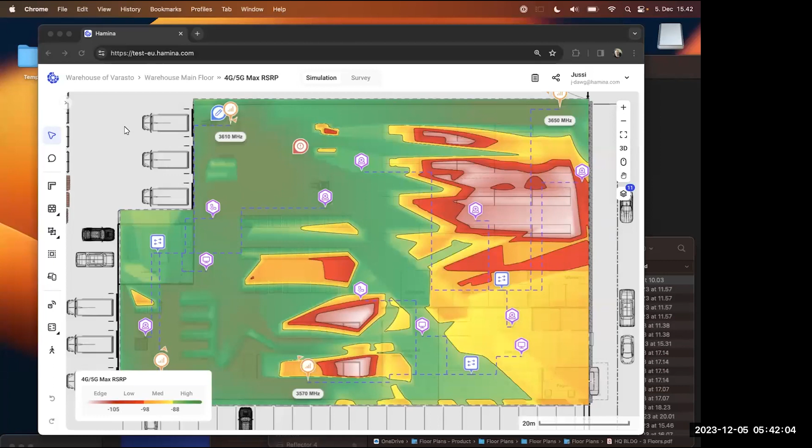Yeah, I mean, since you mentioned - and it's funny, totally unscripted - but you mentioned the warehouse and the racks and shelves and picking, robots picking pieces from whichever rack. So let's take a look at that first. Can you see my screen? I wonder... Yep, I can see your screen. Perfect.

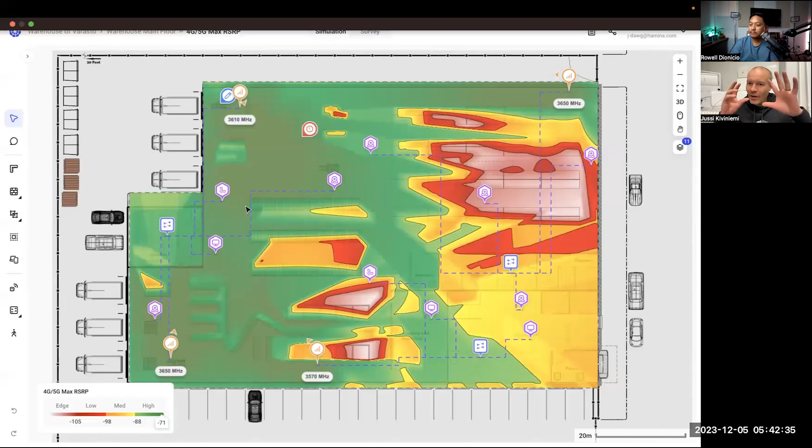So here's our tool. What I did is literally just dumped in a JPEG and then built the racks - took me like 4 minutes or something. Kind of a few main walls and the racks for this smallish warehouse. And it seems like I put in some private cellular access points, and it automatically optimizes them on different channels. But Wi-Fi is similar, and we can take a dive into Wi-Fi later on as well. This guy has a couple of switches, some security cameras connecting to the switches, and some displays, and then these private cellular Node Bs as well.

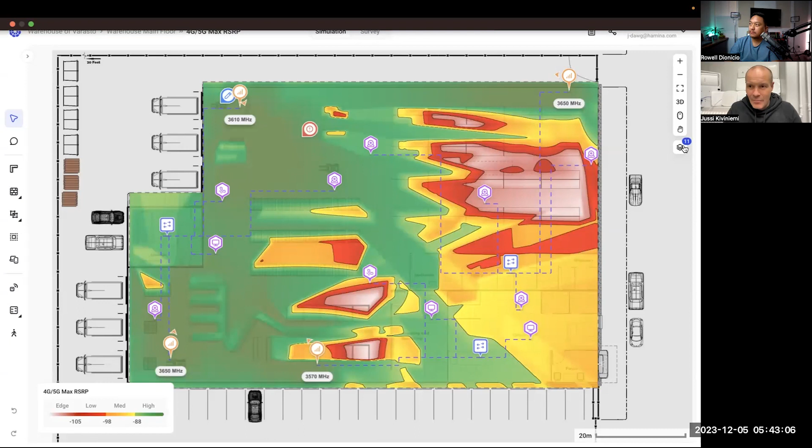But if we look at the 2D, it's quite amazing already that we can actually predict in 2D and see the signals flying through the shelves, and seeing at the bottom you can see because this AP isn't very high, there's shadows behind the shelf, stuff like that. But how do we know, first of all, that we constructed the model properly, constructed the building properly, and then how can we see better how the signals behave?

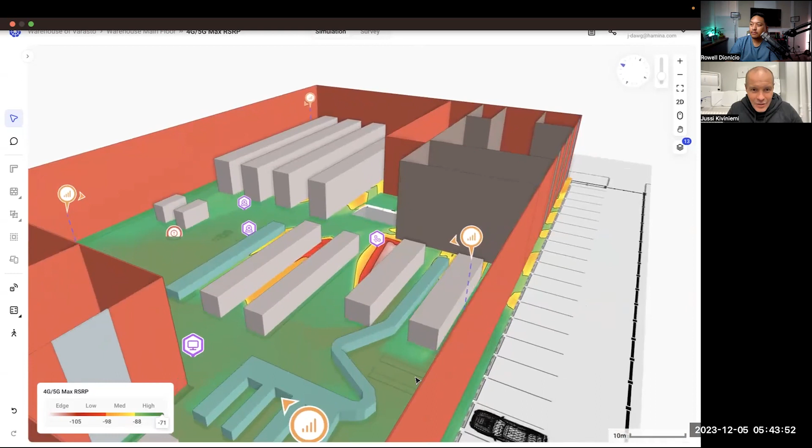That's why we built the three dimensionality, and I think this is pretty exclusive stuff you're seeing, in a sense that this doesn't even ship yet. We've added a lot of look and feel improvements to the three dimensionality. So if this looks a little different and a little better than your production Hamina product for our customers, that's because we will be adding a couple of three dimensionality look and feel additions to this soon as well.

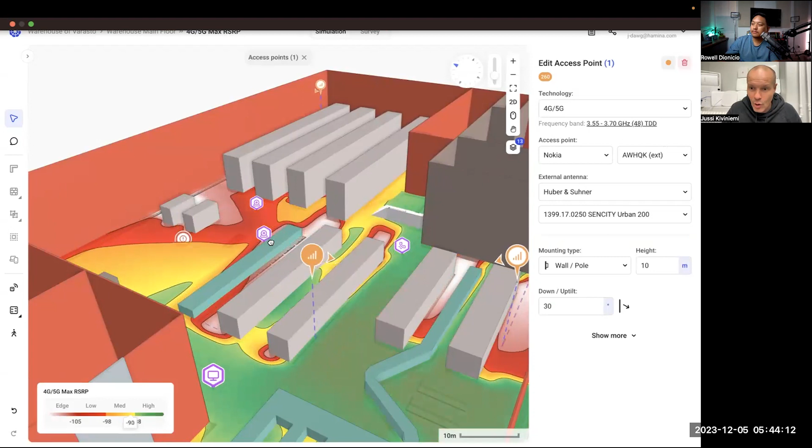But if we look at it in 3D, it starts to make a lot more sense how the signals behave and go over the shelves and stuff like that. It just looks a little bit different that way. And then when you mentioned the floor level versus ceiling level, let's take a look at that. So right now we're looking at 0.6 meters, so 2 feet high from the ground.

That's fairly typical height for a client, and that's where the heat map sits—so that's where we assume the client device to be at. Right now it's at 0 meters, so it's at the very bottom. As we start raising it, it updates almost in real time.

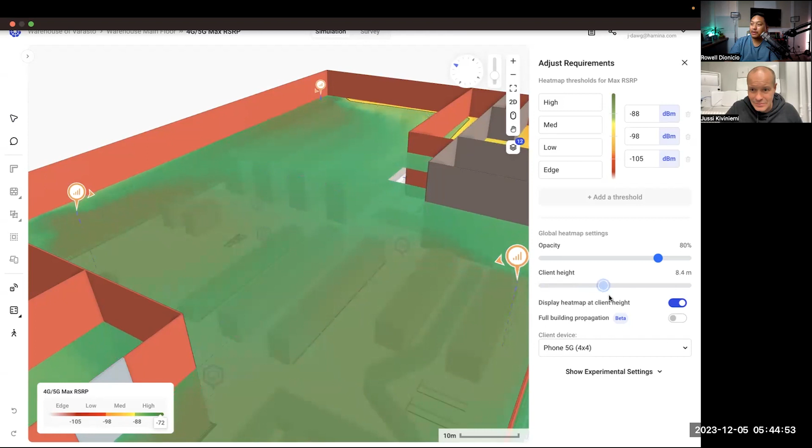Although I mainly operate in feet—I think 8 meters is about 20, yeah, 25, 30 feet for sure. Let's change that for you.

While you change that, I just want to explain for people on the audio: you've got a little knob here that sets at what height a client will be. All you're doing is sliding a slider, and it tells you how high the client will be in meters or feet, whichever your preference is. That way you can verify you've got Wi-Fi signal at the height you need, where the clients will actually be.

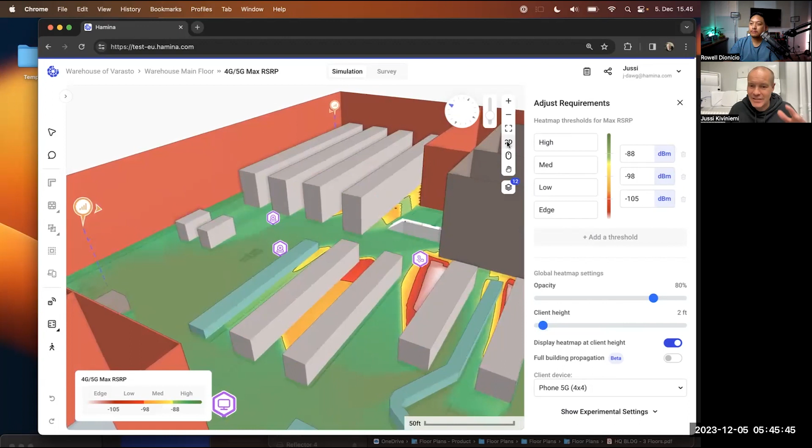Exactly right—this gives a whole different kind of perspective. A few things like validating the project, such as shelf height. For example, here we have shelves and boxes of different heights, and validating that all of that got done.

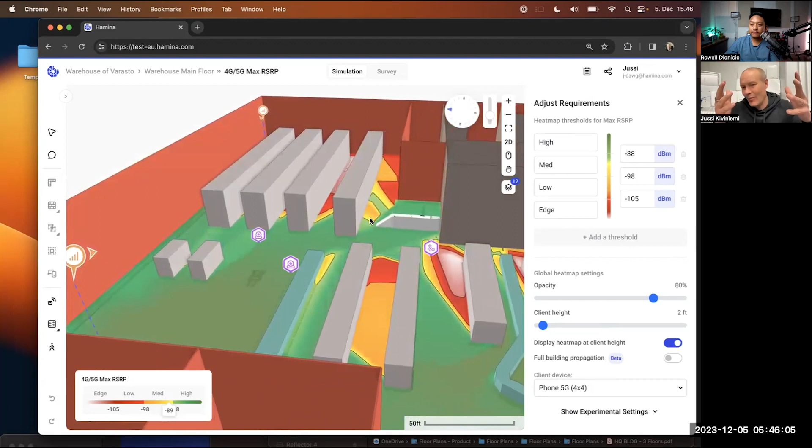The walls are of certain height and appropriate height—maybe you have some walls hanging from the ceiling, stuff like that. But also, when showing this to the customer in the pre-sales phase, or when constructing a report for the customer, it's a different animal.

Actually, if you look closely, there's even a ramp there and a raised floor. That leads us to a whole different dimension of three-dimensionality where you can raise floors, do ramps, things like that.

I'm curious, could you create a mezzanine then? Because I know mezzanines are somewhat popular with a few warehouses. Yeah, you could raise the floor up, or you could create just a slab, things like that.

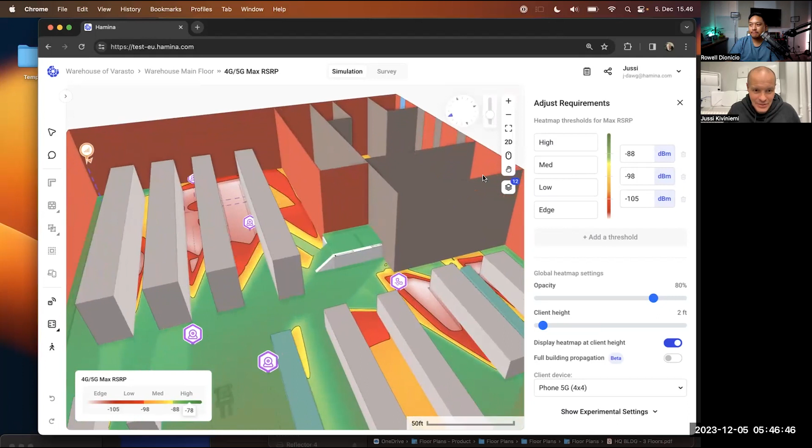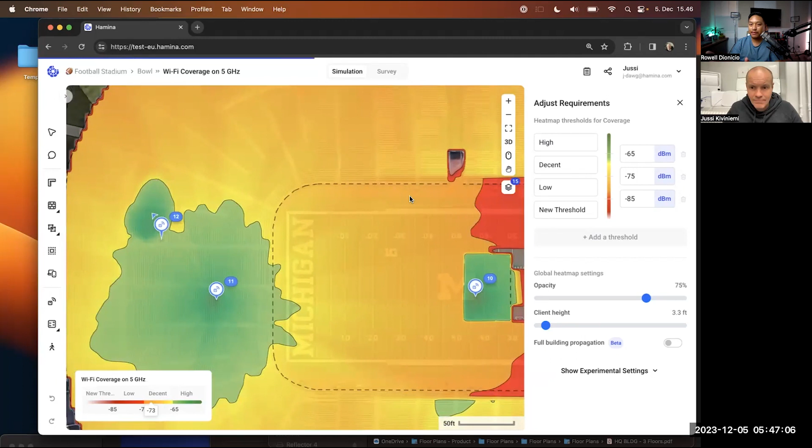Absolutely. And I like how you're explaining how you can show this to people, because I think this is where it really starts to click with project managers and cable installers. Sometimes you don't want those APs installed right over the rack, so it's really easy for them to see, all right, I've got my product there—what does Wi-Fi look like in the aisle? That's a great way to collaborate with others who aren't Wi-Fi professionals.

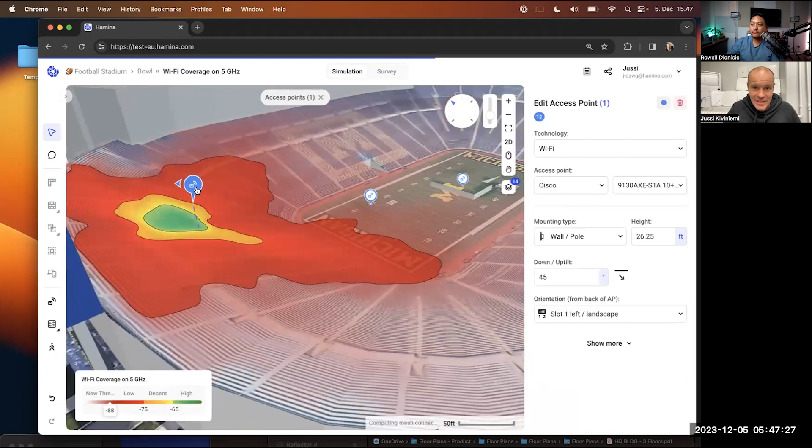And if you use the slopes a bit more extensively, you can actually work your way through stadium design as well. For example, this stadium consists of I don't know, 25, 30 slopes that curve around the stadium, and you can even do quirks like the entrance to the tunnel where people come into the stadium from.

Yeah, actually, some guys when I was showing the product when the 3D feature had just come out were like, 'But you didn't model the place, the entrance where people are coming from,' and live I kind of modified the slopes and put that there.

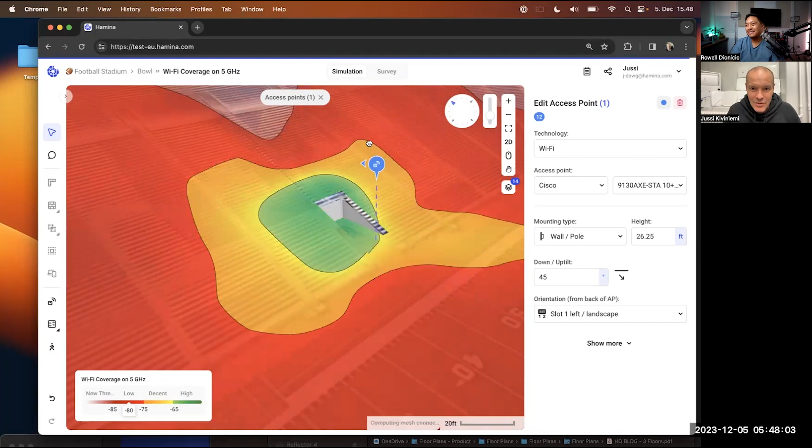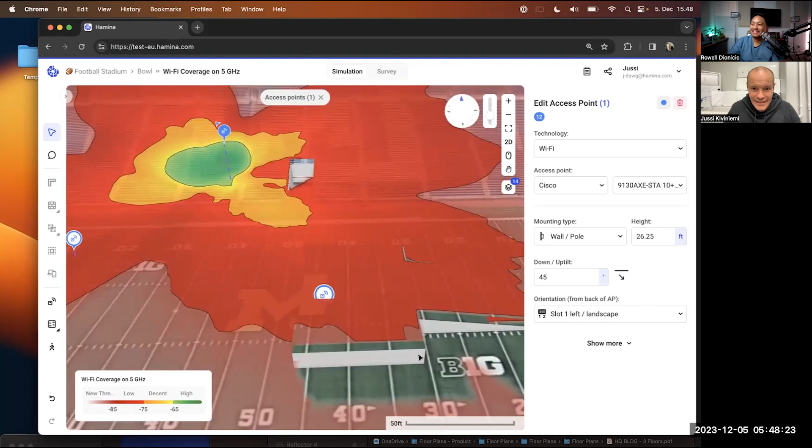So essentially I think the beauty is keeping things simple, but still allowing people to do super complex designs if necessary. For example, see here—we have just a raised floor and then a slope to the raised floor. That's an oversimplified example of how to construct these things.

You can see this ramp leading right onto the raised floor—football field, exactly, Beyoncé is about to perform or something like that. So we actually do the work in 2 dimensions, and then we just flip it to 3D for analysis and validation, stuff like that.

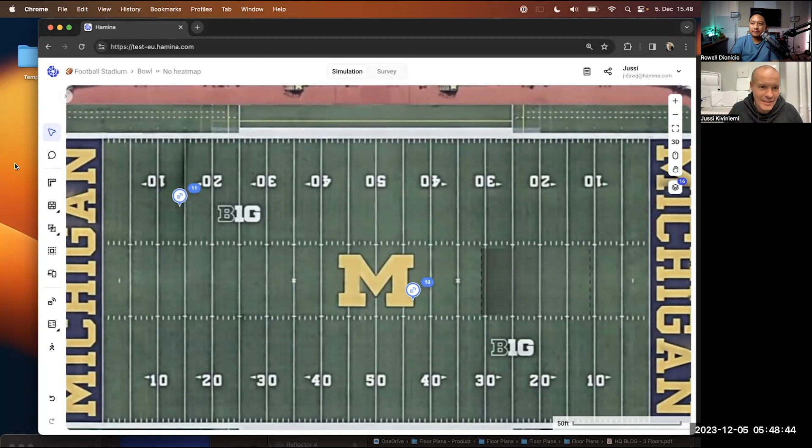Let's create another one of those. We all probably know how to do walls and attenuating objects, but what if we want to do those raised floors and slopes and stuff like that? We just put in the height—let's say for a raised floor, the height of it—and also, of course, what's important is the material of the raised floor, since the signal will also go through that.

So let's put in, I don't know, a 5 feet thing there, and we could modify it after the fact. We'll just enable the raised floors here. Let's say it's exactly 5 feet, and there we go—so we can see, yeah, that's the switch. So you're building the raised floor slopes in the 2D model, then flipping it over to 3D to view it.

Exactly, so you get the ease of use and quickness of deploying these things, but you combine that with true three-dimensionality. At least that was the founding idea here.

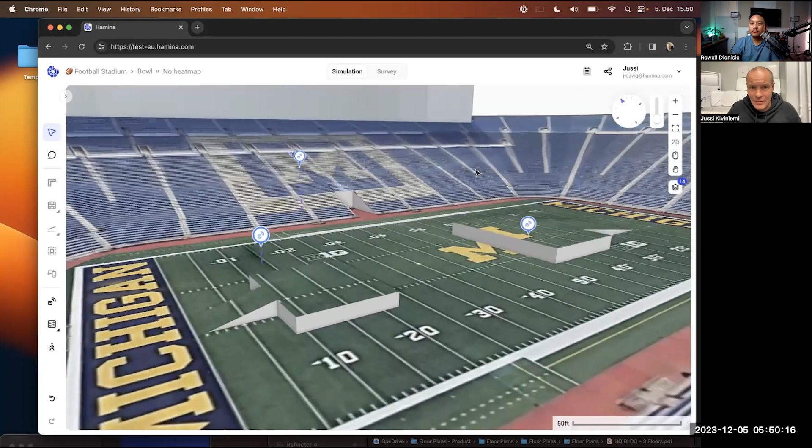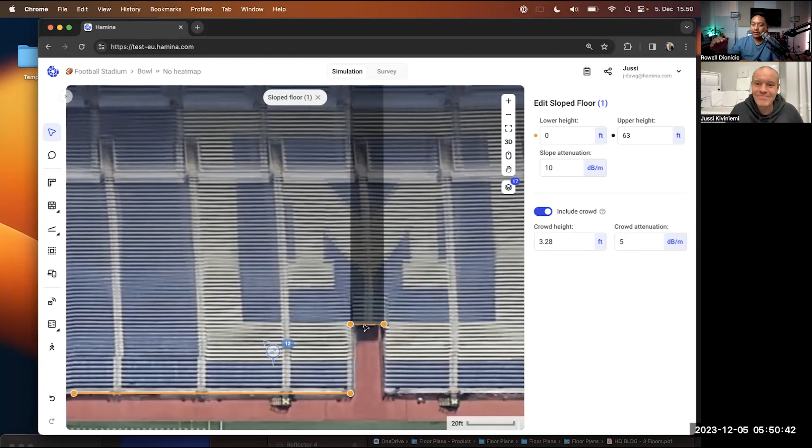The stadium is made out of similar slopes. So here's a slope, you can see the black dots form a line, orange dots form a line, and the next slope would be here, for example, this would be one more slope, stuff like that. So the stadium just consists of slopes, and then we cut the slope so that it starts at the tunnel right there, it doesn't go all the way down like the other slope. It's pretty easy to map it closely to how the stadium looks like, and you can get a pretty good overview of it.

And what you can do with the slopes, because often slopes are used for stadiums and arenas and stuff like that, we actually added a feature where you can directly add crowd on top of the slopes, because often you want to model the audience sitting on the slopes, because that will affect the signal, especially in underseat type of deployment where you actually utilize the crowd to your benefit. You want to see how far that signal can get through the attenuation of the crowd.

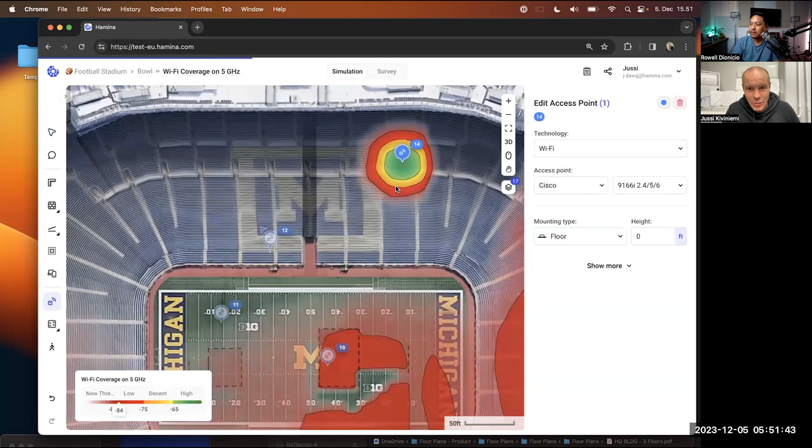And for example, let's put a floor mount Cisco 9166 here, and we look at 5 gigahertz Wi-Fi. There we can see that it's actually quite nicely contained, until, because it flies over the crowd, it actually does hit these opposing stands, because there's not so much crowd in front of the AP there compared to downwards.

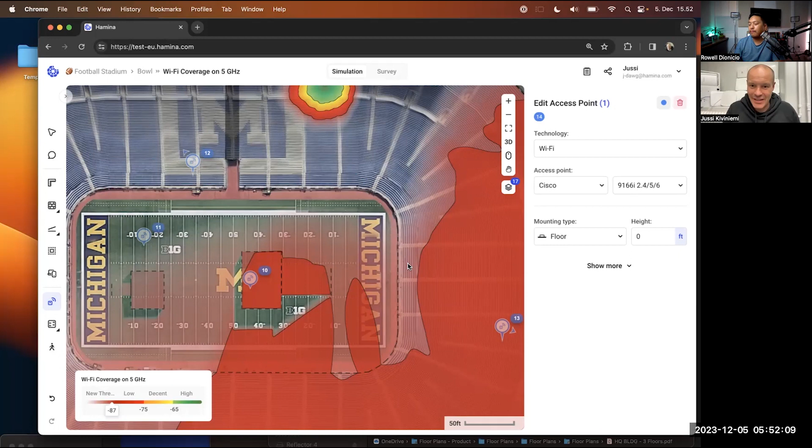So that's also something you can predict, that's predicting the signal of that AP even on the other side of the stadium, like how far that signal would go. There's a lot of stadium deployment persons, like Chuck Lukaszewski, who has spoken about this very thing, where from the very other end of the stadium you can hear an AP and get actually decent throughput on a phone from the other end of the stadium.

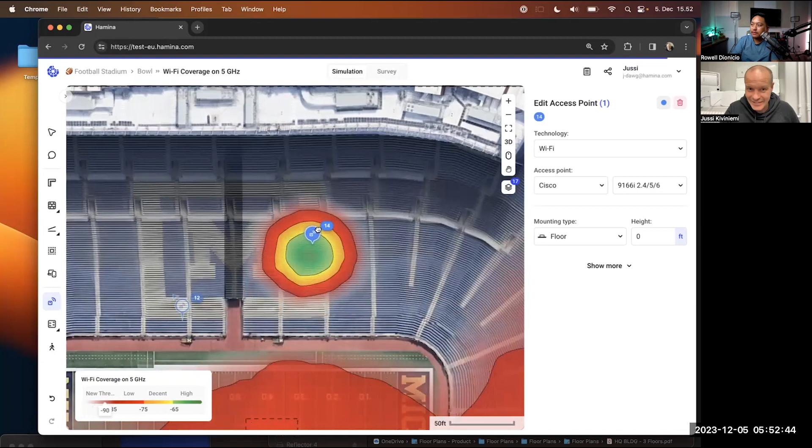It's just the thing that happens even if you do underseat APs. But if you do underseat, it's quite well actually contained, because I have modeled some crowd on top of this. But if we move this guy, you can see the propagation changing, it's very well audible everywhere. So that crowd attenuation is actually working.

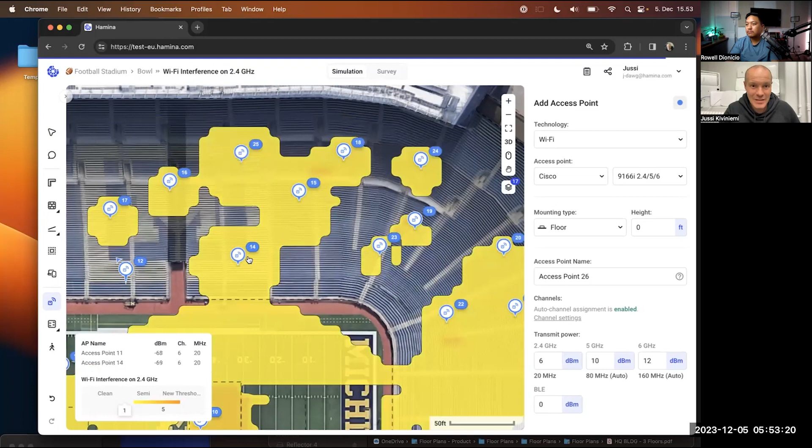And of course, we could also start to see interference problems. Let's make this a chaotic scenario where we're enabling everything on 2.4. So we'll enable auto channeling, but we will enable all the 2.4 radios. And when we start building this out, of course, if we didn't disable any of the 2.4 radios, no matter how badly the software tries to optimize the channels, the 2.4 will pretty quickly turn pretty chaotic. That's just the nature of the beast. But it's quick and easy to deploy and easy to design and easy to see.

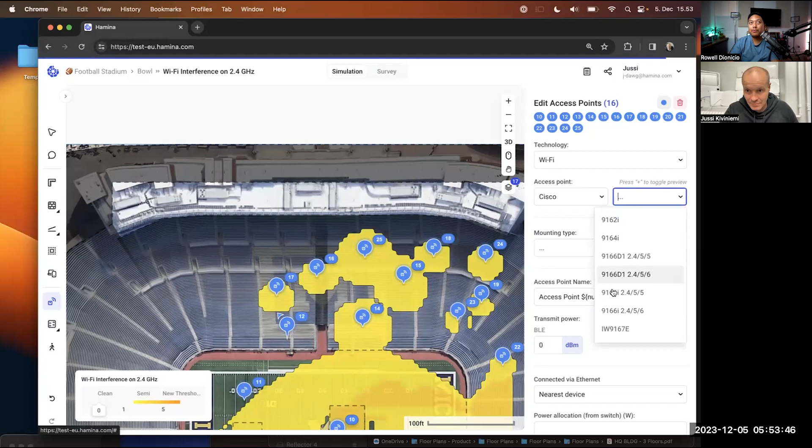All right, I have an issue here, I need to change frequencies, there's not enough 2.4 available. Even if someone were to say, well, maybe the crowd attenuation might help, it's not helping it very much.

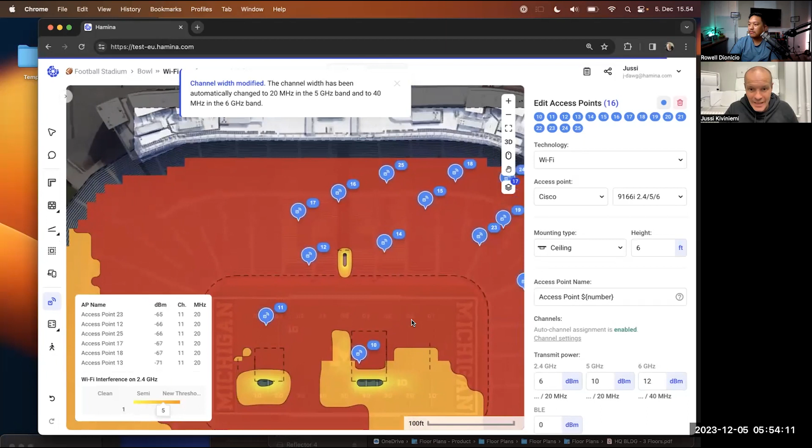Crowd attenuation does help, though it's not the ultimate solution. If we have everything at 0 feet, it helps dramatically. But if we raise these to 6 feet on poles, let's see what happens with the interference—there's a dramatic difference in crowd attenuation, just absolutely massive.

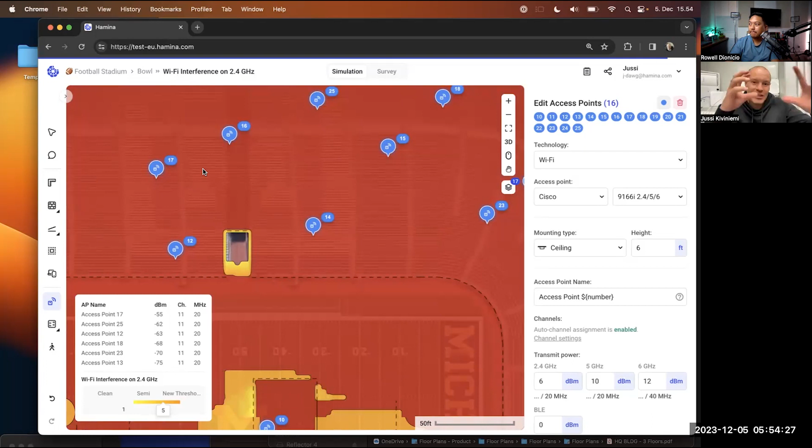We can see on the bottom left how many APs are interfering—quite a lot, even though we haven't nearly filled the stadium with APs. It's pretty bad. Coverage is easy in the stadium; the hard part is eliminating the interference.

Of course, if we selectively disable the 2.4s, we'll start to get a better result. But then we'll end up disabling quite a few of those as well.

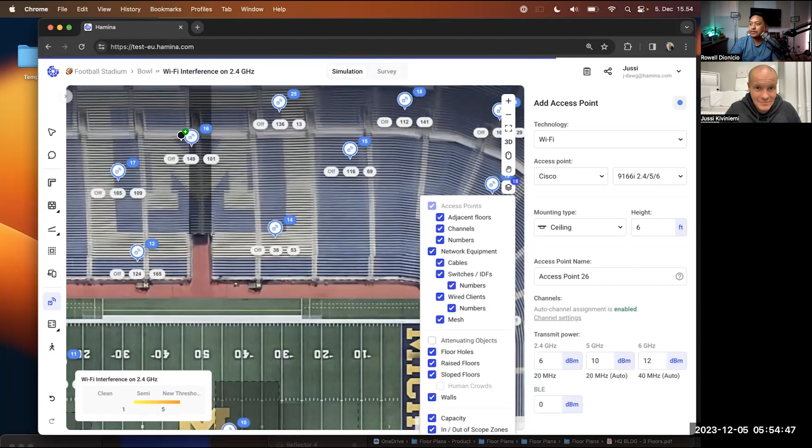That's good—I like the whole crowd attenuation, sloped floors, raised floors concept. Really cool, useful features for designing a complex environment. For me, it's more in higher ed use cases where you've got sloped seating, like in a lecture hall, so I can see this working pretty nicely.

We could look at a quick university design and see if we can get any 3D benefits out of that. So you're fairly familiar with university, aren't you, Rowell? Yeah, you've served your time, one could say. Done some pretty large lecture halls, and usually capacity is an issue with the installation options as well.

When working with installers, they always want it hidden, tucked away in the walls and ceiling. Some don't want underfloor because of construction costs, but this is a great way to show them—design it your way and see what the Wi-Fi looks like. They tend to agree with you afterwards once you create a design, because you get all the stakeholders involved—construction, architects, IT people for that specific school.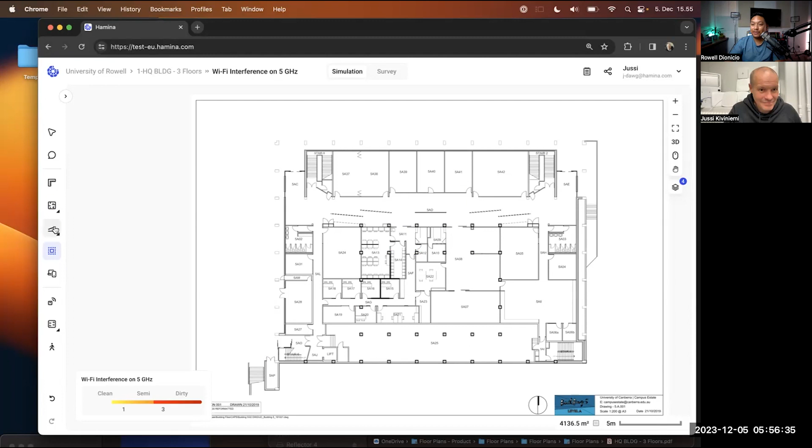When I'm showing them what happens with a bad installation, they tend to listen. I did this with Hamina, where they did a lecture hall and wanted to tuck the APs away in the walls, hidden. I showed them what would happen if somebody walked in—it showed devices only stuck to one AP, even though there were three APs in the room. So we went from mounting them on the wall to mounting them on the ceiling, unhidden. Once I showed them that with Hamina, they agreed—they bought the idea.

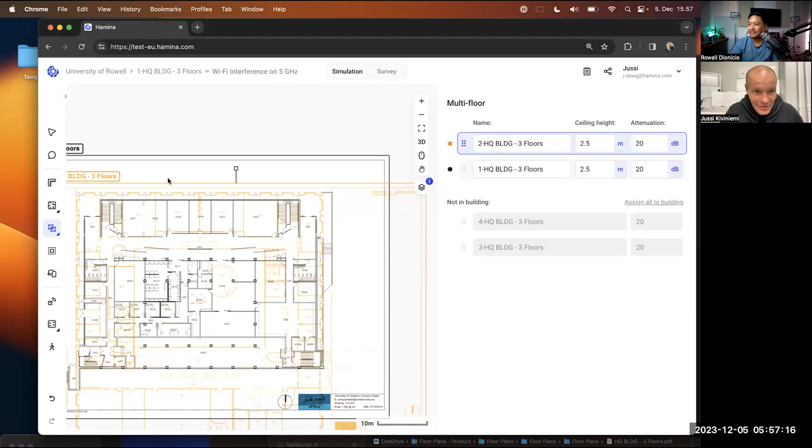What I'm doing here is building maybe an educational space—seeing how the stairs line up. I'm just building something we can test against. I have no idea how these guys line up, so maybe that's a different building. But we'll use two floors, line up the stairs, and for the second floor we'll bring in some walls and stuff.

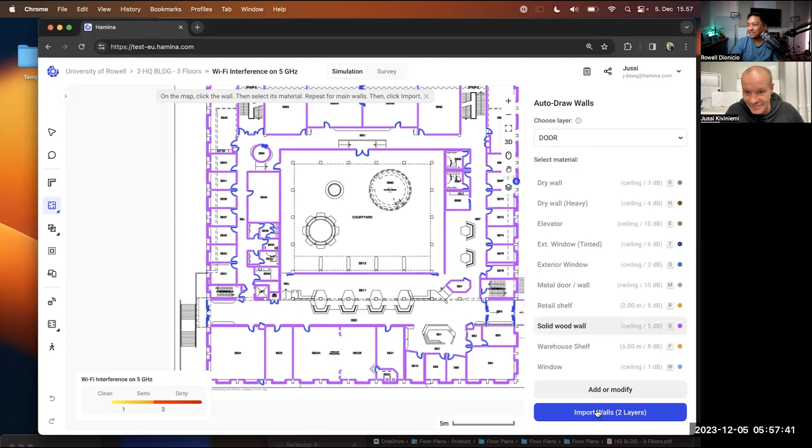That's automatically scaled since we're building this out pretty quickly. Well, yeah, I've used the software once or twice. You could say so—in the matter of a few minutes, you built out two floors with the walls aligned, multi-floor.

Here's a courtyard, so we might want to use a floor hole on the courtyard to freely pass the signals through. There we go—you can see the walls derived from the automatic wall drawing system, same with floor number 1, looking decent. We'll take out the walls and start.

What's your AP of choice these days, Rowell? What do you deploy the most? Using the Mist AP45—that's Juniper AP45, a Wi-Fi 6E, 6 gigahertz capable AP. So let's start deploying.

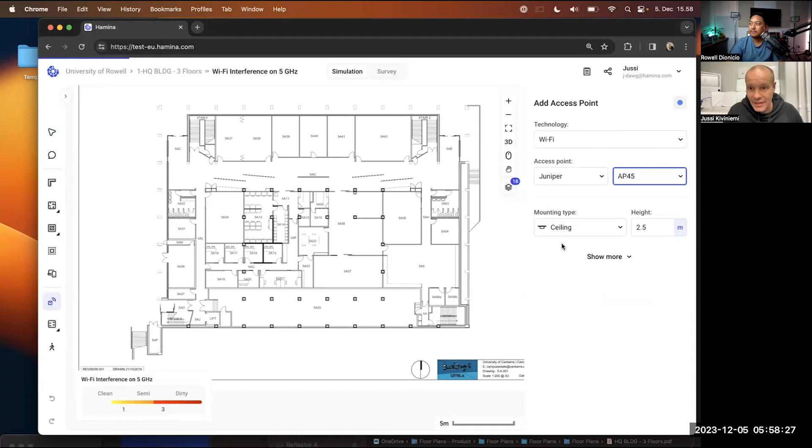But before that, channel width—what's your favorite channel width? How do you like to configure it on a carpeted space? For 2.4, it's just 20 megahertz. For 5, I still use 20. And for 6 gigahertz, I'll do 40 or even 80. Excellent—and on 6 gigahertz, you guys have all the luxury in the world, right? You have all that 1200 megahertz.

So what we implemented is this automatic channel width selector. Every time you make a change, it calculates the channels and optimizes them. Every time you add an AP, move an AP, whatever you do, it also looks at CCI and decides whether it can handle the current channel width, or whether it could go higher or lower. Let's look at that in action.

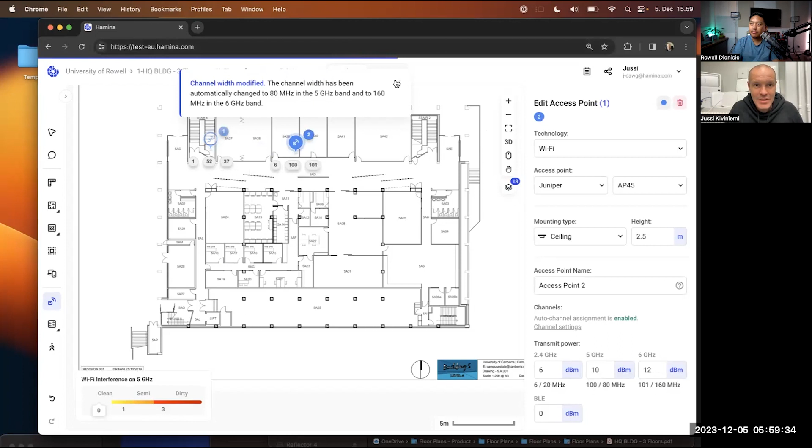So it says, okay, I'll automatically start to work on the channel widths. There's no interference obviously, so we'll look at primary coverage to begin with. And it starts calculating this on all three bands as you place these APs, except on 2.4 we don't need that.

80 on 5 might be a good idea, but since we're doing a pretty dense deployment, it automatically fell down. It started off at 80 megahertz wide at 5 gigahertz as you place the first few APs. Now that you're over 6 APs, it said I'm not using 80, I'm using 40 megahertz for 5 gigahertz. And now it went to 80 on 6, because the APs are close enough to interfere with one another.

That's kind of the thing. If we made a sparser deployment, there'd be no problem there. And now it says I also dropped 6 gigahertz to 40 at this point. So that's kind of how that goes.

That's really cool. I like how you're able to just automatically do that without me having to go back and redo all these APs in a new channel width.

Yeah, exactly right. And there we can see the end result, and we should not see a lot of interference here. It's clean on 5, it's clean on 6. So our automatic channel width optimizer is pretty aggressive, it's pretty picky, it's very Finnish, so it has to be perfect, otherwise it will drop the channel width.

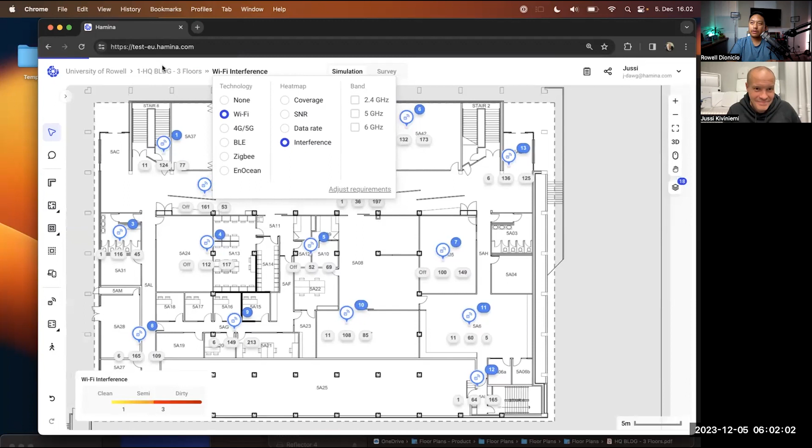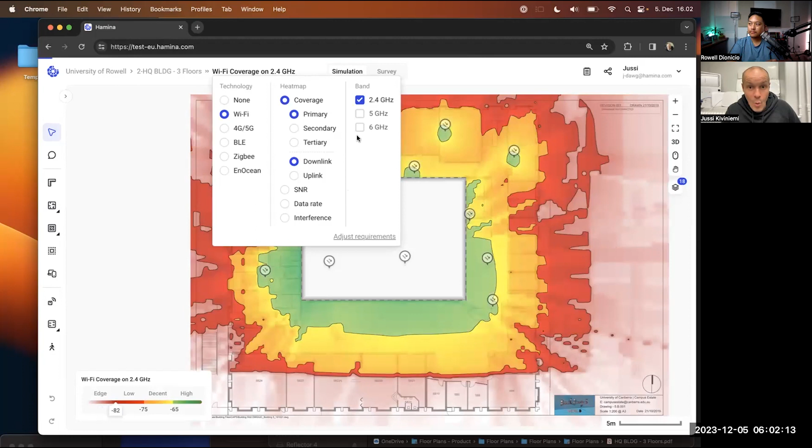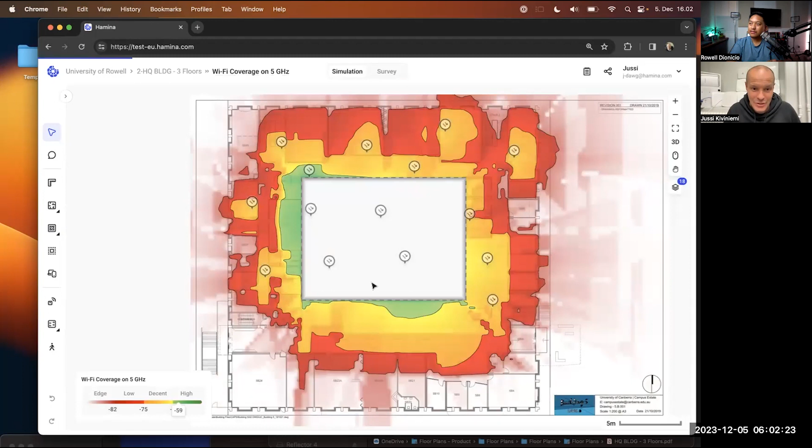Let's look at floor number 2. If we look at interference, of course it's clean. If we look at coverage, you can see it's blasting on 2.4 as well as 5. It's blasting through the hole, of course, but if you look at individual APs outside of the hole, it's fine. That's what happens, right? We all see that in courtyards, you get a massive number of APs audible in this area.

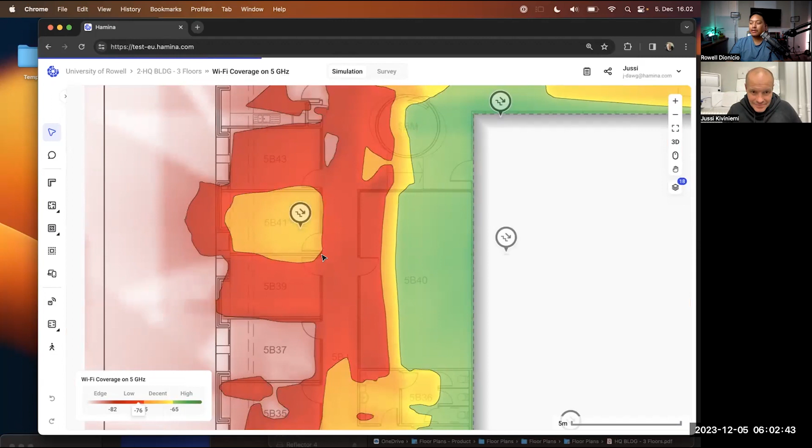So on another floor now, these icons that look like APs are actually an indicator that there's an AP on the floor below, indicated with the arrow pointing downstairs. So that's how you know there's an AP down below. That's exactly right. And now we could start building up the network.

Maybe we would actually prefer a little bit more of a corner placement here.

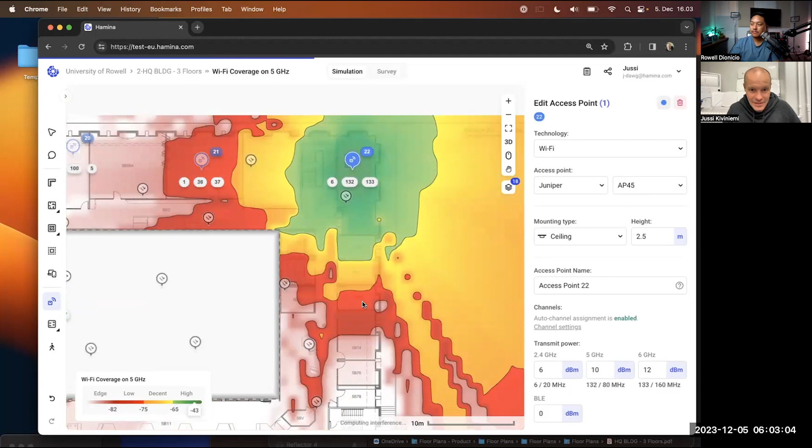If you're okay tolerating APs associating at times to the floor above or floor below, that's what we get.

You might ask, how do I need some kind of CAD stuff to convert this into 3D? No, you may have used this in your pre-sales work as well as customer reports. You just flip it over, because we already built in the walls from the PDF—we clicked on the wall, so this comes free of charge. And if you want to do more, like change wall materials, that's doable too.

I've used it in a pre-sales mode where someone looked at the floor plan and said, 'I'm concerned that signal doesn't get into this room,' even though they saw it in the 2D model. So I converted it to 3D and said, 'Look, I have the wall outlined here, there's an AP exactly on this side. The signal is predicted to go into that room at negative 60 dBm,' and they said 'Oh okay,' and then went on with the installation.

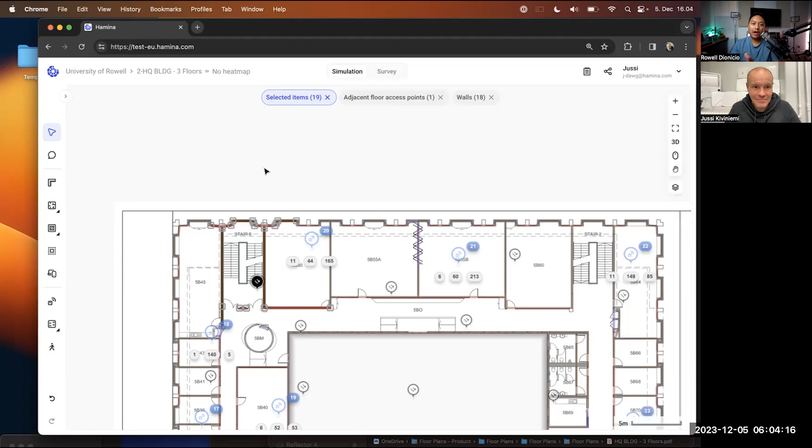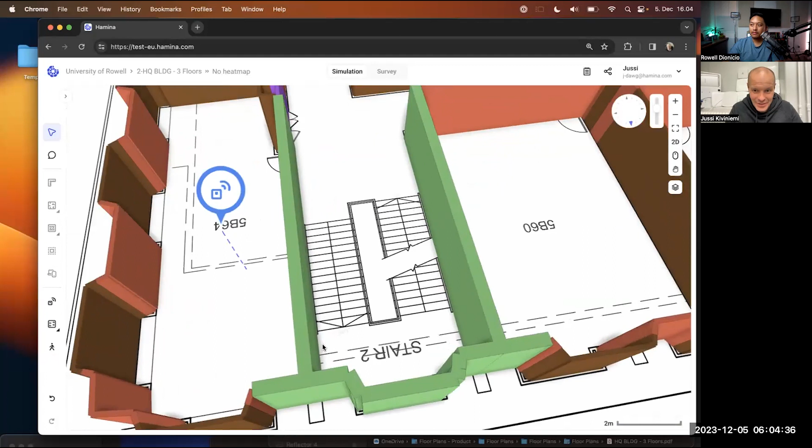Exactly right. And for example, the staircases from the PDF were not a separate layer, so I just flip them into concrete, and now you can say it's much thicker material. This is the kind of stuff I also like to use with customers, to see how thick the walls are and things of that nature.

So should we look at now that we've done the design, what happens after? We did the design, they did the install, and we need to validate it now. So does Hamina allow you to validate the Wi-Fi network as well?

I'm glad you asked—nowadays we actually do. We built an app for the iPhone, the iPad, and the MacBooks to allow for exactly that. We also built hardware for that too. This little box has four Wi-Fi 6E adapters, and the app hosts everything like maps. You just use a mobile device to do the validation, connecting to that piece of hardware.

Correct, and the mobile device can be an iPhone, an iPad, or even a MacBook, as long as it's an Apple series device. For analysis, you can use the mobile app, and for more comprehensive, bigger screen analysis, you can revert back to the planning tool, if that makes sense.

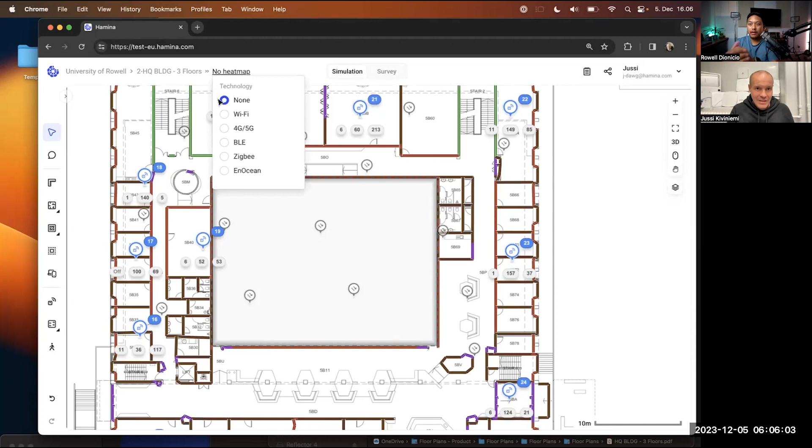And all that data collection from this device—does it get stored on the mobile phone or iPad and then sent to the cloud? How does that work? It's first stored in the iPad or phone, and when it has a chance, it pushes that to the cloud. So it works completely independently of the cloud.

Let's say you're surveying a nuclear power plant or a mine where there's no internet access, and then when you come back to the ground level, that's when you breathe some fresh air, and the tool will automatically sync back to the cloud.

Yeah, because I do come into a lot of scenarios where we're just not given Wi-Fi, or whatever Wi-Fi we're on doesn't have access to send this out to the cloud, or it's slow because they throttle it—you name it. And this device, did you guys build this?

This is made by our partner Oscium, who make wireless hardware instruments like spectrum analyzers and oscilloscopes and things like that. I think that's where the name comes from as well. It hosts four 6 GHz capable high-end Wi-Fi radios, as well as battery.

It has a USB-C connector for data, but also another USB-C connector for simultaneous charge if you so desire, and a USB-A port for a spectrum analyzer. There's a strap that comes with the main unit, and you can optionally put a small spectrum analyzer in the strap or not, so spectrum analysis is optional based on customer feedback—that's what people seem to want.

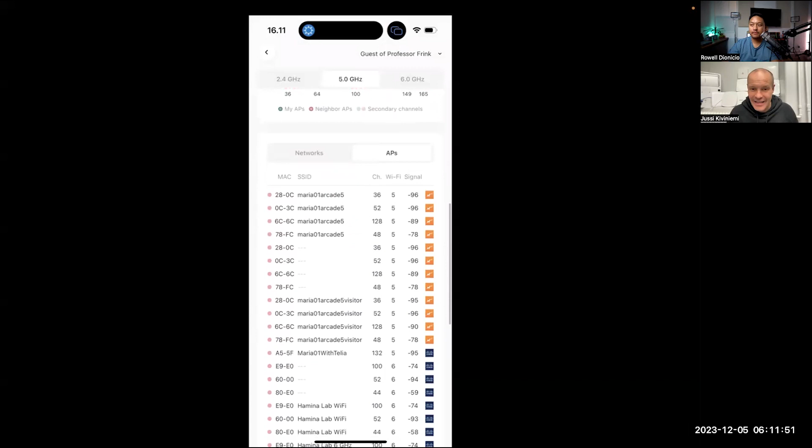Exactly, more of the analysis of the network you're looking at. But if you just need that quick glance to do the validation survey, the very top portion of this page gets you what you need as you're doing the validation survey. Exactly right, see your primary and secondary, see the channel distribution, and then if you need, see what SSIDs are out there, what APs are out there.

Very cool. And along the top you still have other tabs to go between the different bands, so you can see 2.4, 5, and 6 gigahertz. For example, 6 is pretty quiet here, just a neighbor on 6 gigahertz.

So you switch between two windows there? Yes sir, one showed kind of like the networks, and then you scroll down. What's this one compared to the other one? Good question. This is kind of the starting screen, if you will, where we just get a quick glance of the currently audible signals. It also tells you the hardware device is present and connected.

And then here's where you have all your projects, so if you want to take a look at a specific project, no problem there.

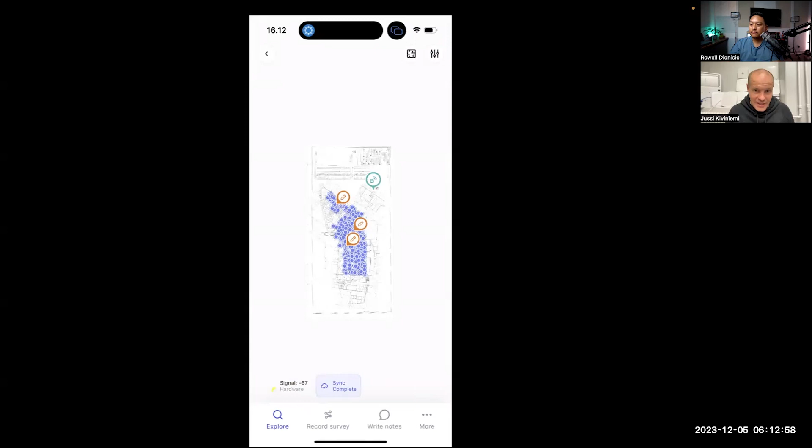If we just pick a project and search for it, we click on it. I have hundreds of projects, so it's probably better to search for it.

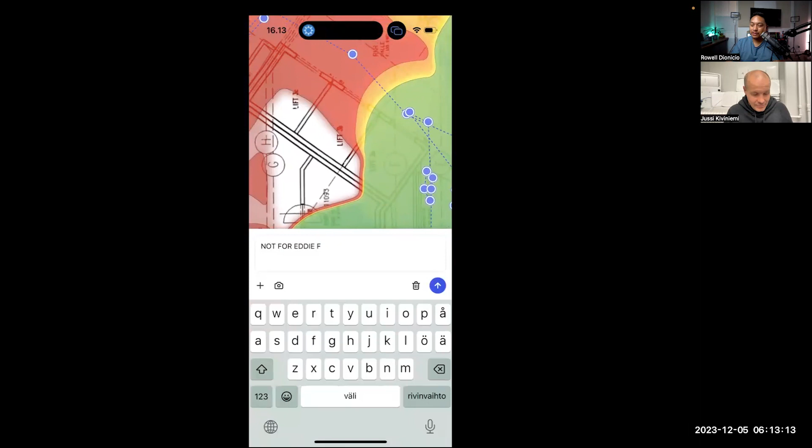Then we can look at here's where I walked, here's where I took notes. So there's a way to view your validation survey afterwards and look at it on your mobile device, once you've actually walked with the phone.

It seems like somebody left a note next to the elevator saying, "Not for Eddie F," whatever that means. Not sure.

When you get this, you can bring in the project you started. Let's say you did a design on your cloud-based tool, then they all show up here, and none of the predictive data is there to disturb you. We look at survey as a different animal, so we just use the floor plans and the scale, and you're ready to go to survey if you've done the design. Or maybe you just put in the maps in the browser-based tool, and those are shown here. Or maybe you build the entire project using the mobile tool. So even if you have PDFs, CAD files, anything, you can bring them here, create a new project here, put the floor plans in the mobile app, and then you're ready to go.

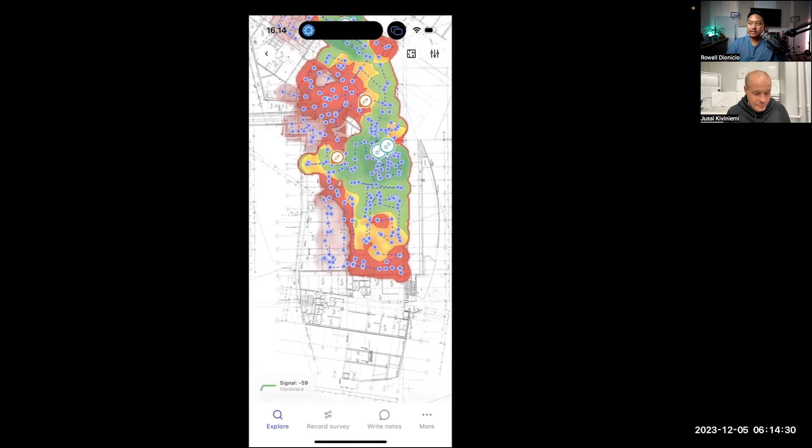So what you're saying is, once I do the design, if I send somebody to do the validation, they can open the same project I used to create the predictive model. Exactly right. But you're not going to show them the predictive APs, you're not going to show them the walls. It's just the floor plan, and they can just start doing the survey. Exactly, they're ready to go without distractions.

Before you move on to the type of survey, I think licensing is a big thing, because if I'm sending someone, how are they going to log into this app? And is the survey piece included with the predictive design, or are they separate products? Really good question. Our planner is so inexpensive, starting at 390, so we couldn't include the survey in it.

But the base survey package to equip a surveyor starts at 2,490, and it includes the Nomad hardware and the app for a year. Subsequent years for the app are 780. That's per user pricing, but if somebody leaves and somebody else replaces them, you can reassign the license to a different person. It's per user for the app, and the units come with the app—you buy them as a bundle, 2,490 for the bundle. And if you want spectrum analysis, that's an extra 900.

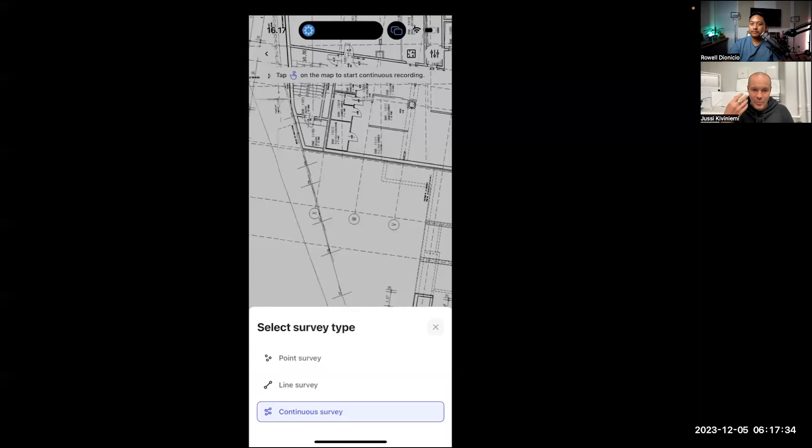It means a few extra clicks if you compare that to a continuous survey, but it's a lot more relaxed way of doing surveys.

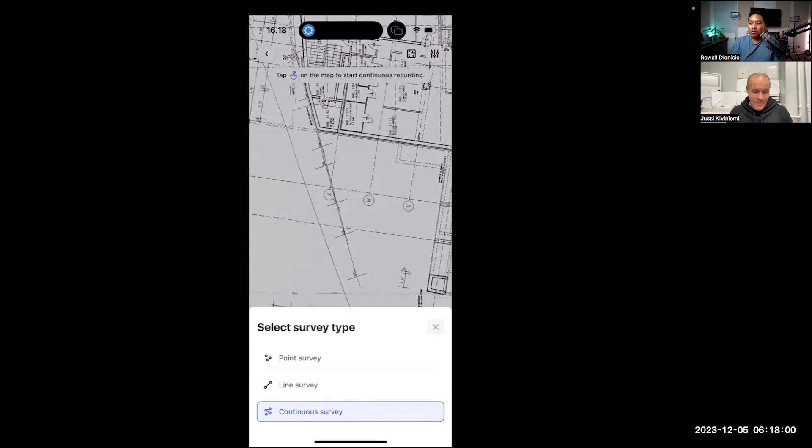What would you say is the recommended way to do these surveys? If I were going to go into this one specific room and I can't really walk in the room, maybe I'll do a point survey. Or if I need an additional survey point, I'll do the point survey. I just stand there, tap, wait for it to scan all the frequencies and then collect those data points.

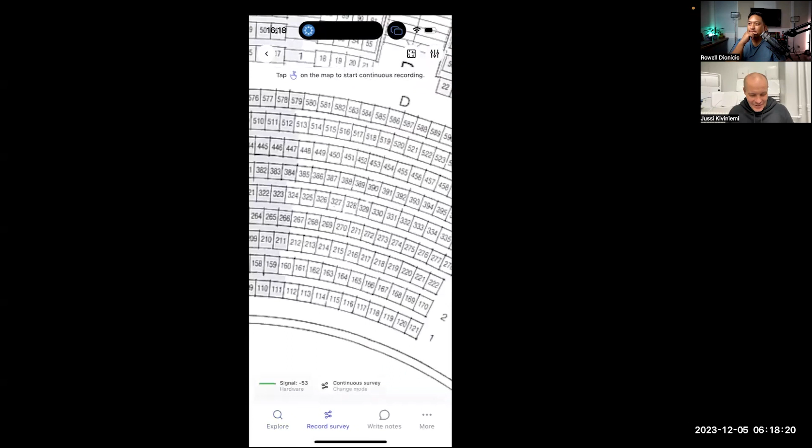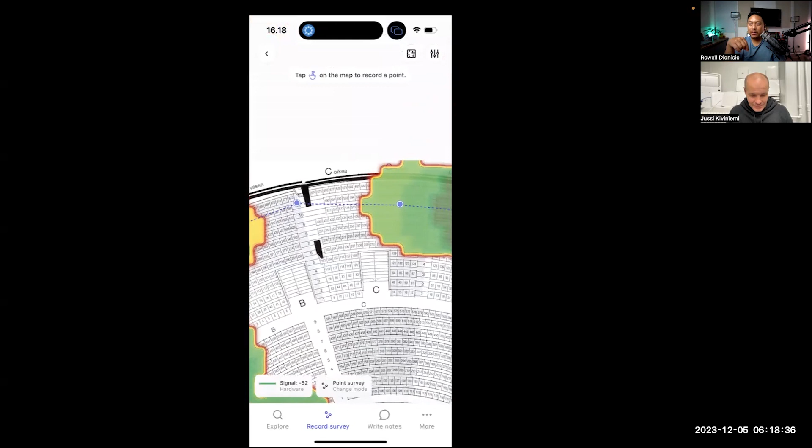Exactly right. Let me open this up. There's already survey data here, it seems, but that's fine. So if it was a tight space like a room where I needed to collect a little bit of data, let's say on the staircase, I would just click there, and see that. Would you have a little indicator of how long you have to wait until it stops collecting that data and you can move on?

Precisely, precisely. Let's take an airplane here. Let's see how that goes.

Are you doing surveys while you're in flight? Of course not. This is actually me as a pilot trying to survey the cockpit real quick, I was trying out the three-dimensional modeling.

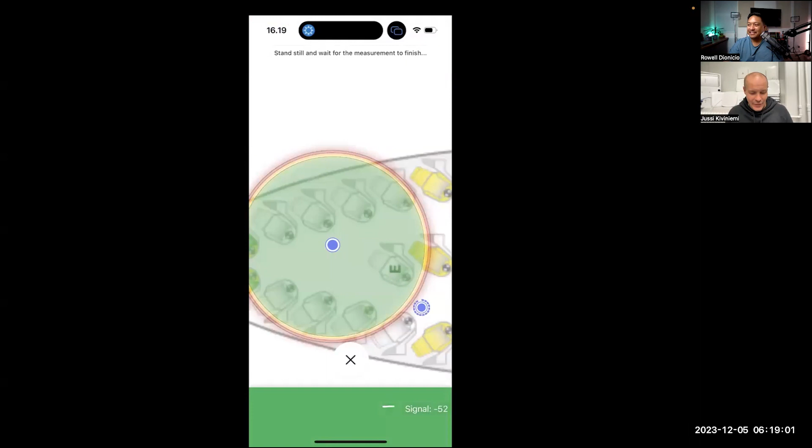So this also becomes almost like a coloring book where you fill the area with surveys. That would be the point surveys.

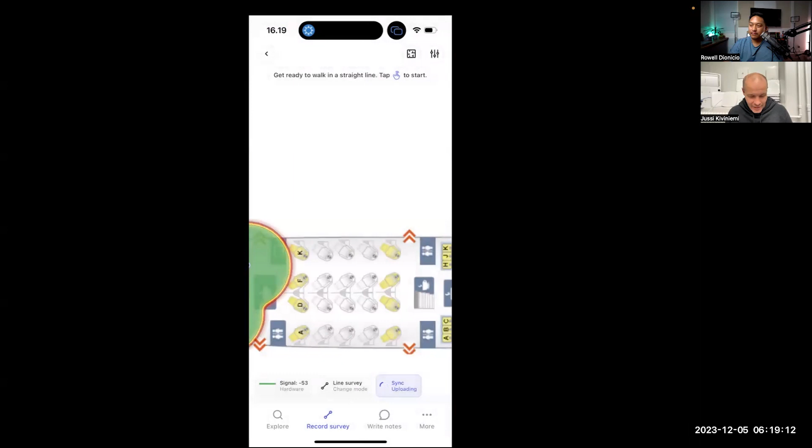Then we could switch it to line, and we would click at the beginning, see how the dot appears, walk to the right, click at the end. And now you could relax, walk to the next aisle, click at the beginning of the aisle, walk towards the front of the plane where crew typically sits, and then click there. That's the beauty of the line. But obviously, the beauty of the continuous is you just keep clicking your way through, it keeps recording.

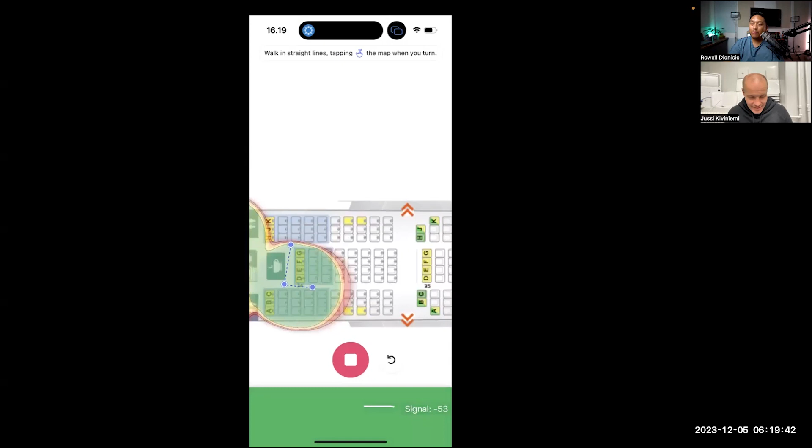At what point would you actually tap on the screen to create those blue points? Can I just keep walking, or do I have to tap on it at a regular interval?

You would tap on it at a regular interval whenever you see a good landmark, or whenever you reach the end of the aisle, at least, and as frequently as you can see a reliable landmark or know where you are. For now there's no AR assist stuff like that, but that's definitely coming.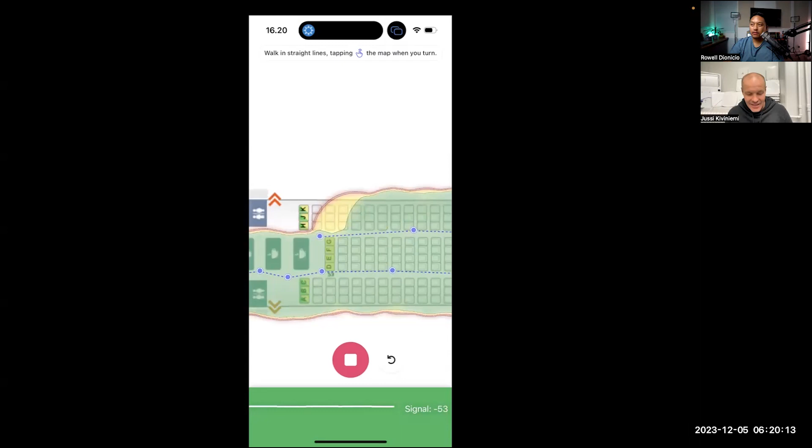Yeah, I'm a big believer in Apple's RoomPlan. You can see some of my posts on LinkedIn about that too.

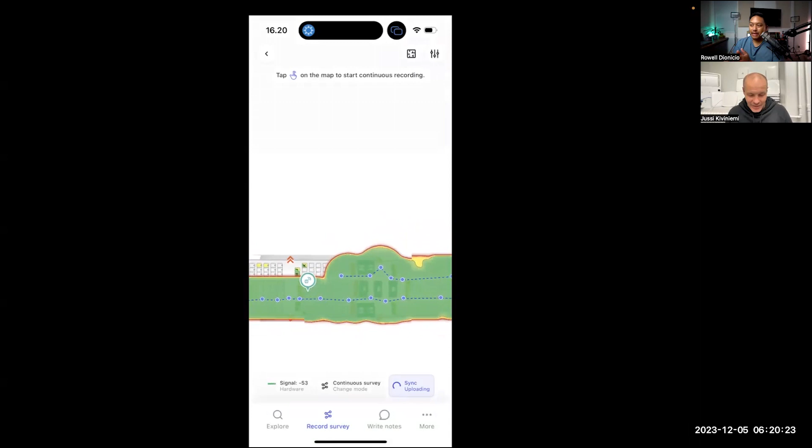But yeah, if you were to make a turn, you should tap on that to indicate that you're changing directions. Precisely right. So whenever you turn, whenever you stop walking, and whenever you start walking, that's when you would click on the map.

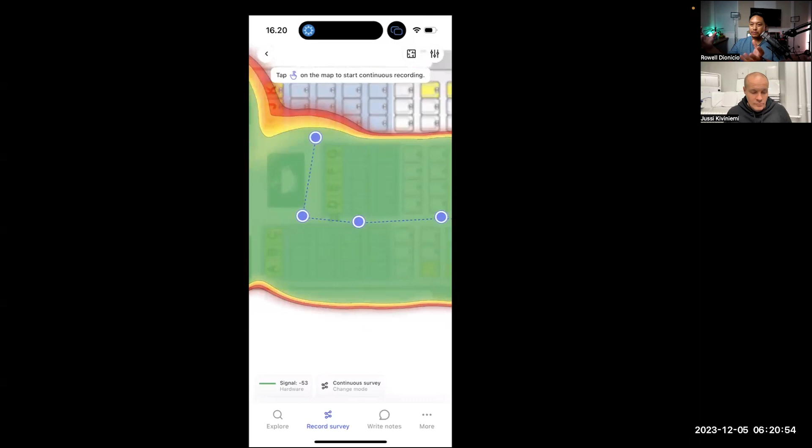And can you go into the data collection part for continuous? So I see you're walking and then there's aisles. How far should those lines be between each other, until it has to do some sort of extrapolation to come up with, say, in between those two survey lines, it needs to predict some signal in there because you didn't exactly walk where the people are sitting. So what's that distance that you need to have between survey lines?

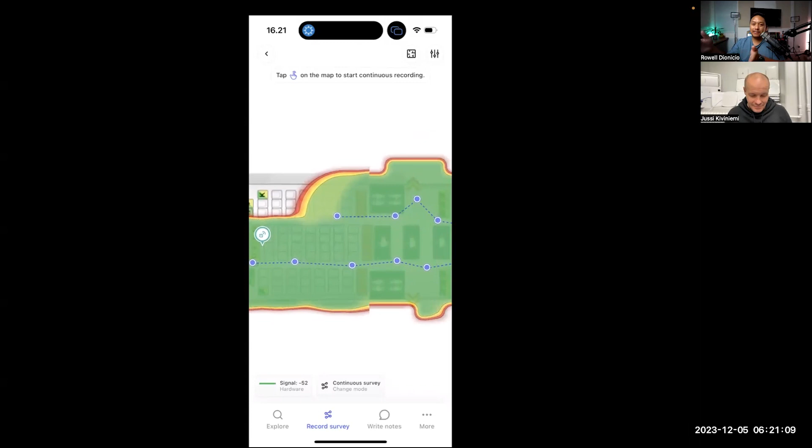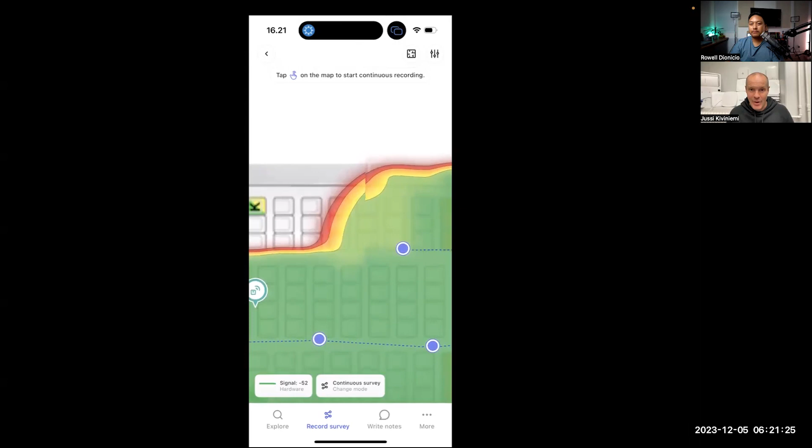I think we try to put a reasonable default on the extrapolation. It all comes down to the amount of extrapolation we do. So we try to put in a reasonable amount where we know that if it's a fairly free space, the RF doesn't change within a couple of meters too much. But if it's a sharp corner and you have thick shelves or thick walls around that corner, then certainly you want to click as frequently as you can. So as long as you click when you stop walking, start walking, or turn, and whenever you see a good landmark, that's good.

But your question is like how close to one another should the paths be. I think in free space less, and in very closed space with lots of clutter or walls or stuff like that, then it would need to be more.

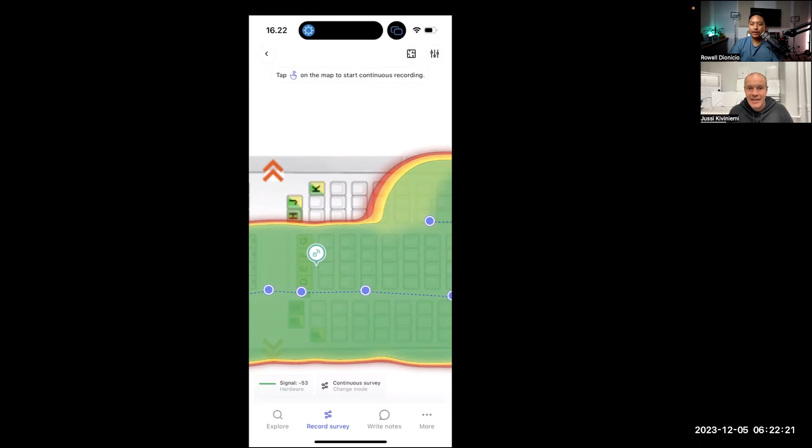We try to put in a reasonable amount of extrapolation there, but you can go as detailed as you want as well. I'd say the more you walk, the closer those lines are, the more accurate your validation survey will be.

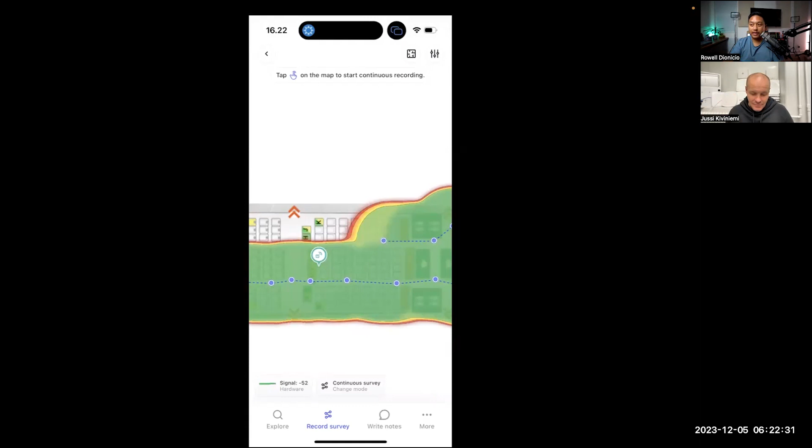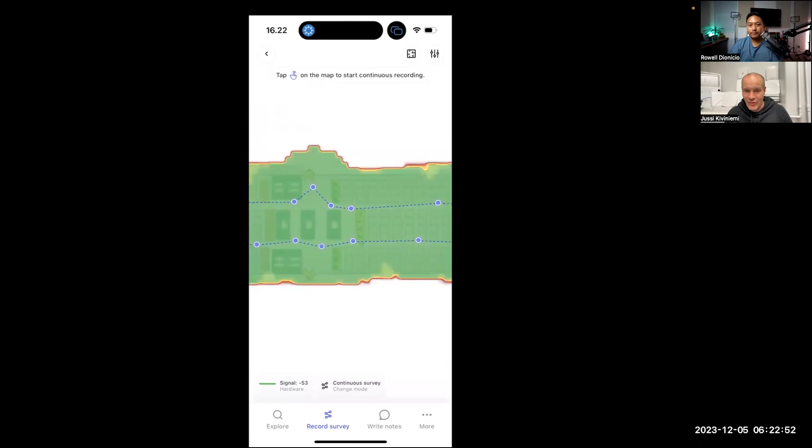But you will have spent more time walking. In a lot of my cases, whenever I'm walking and there's a wall, I typically walk on both sides to show what that attenuation would be of that wall. Preferably, that would be a good idea as well. So as much as you can afford, you should probably walk. That's how I would put it.

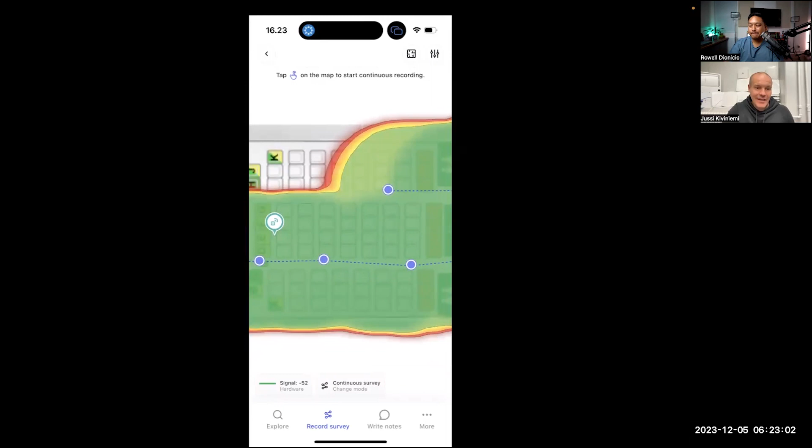So that's kind of that, and then we would get that same thing on the planner as well. Let me just check on that. Once you stop, when does it upload that data to the cloud? Do you have to say 'upload now'? It already has.

It does it as long as there's an internet connection. Now, do you have to end your survey in order to upload, or does it upload as soon as you stop actively doing the validation?

That's a really good question. Our app, even during continuous survey, at least saves the measurements on the local storage. So even if a catastrophic failure happens, it still has the data - and it's happened to me a lot, I forget to charge my batteries, I'm a sloppy guy. It's happened a lot during stress testing, sometimes intentionally, sometimes not. What it does is it just misses a couple of the last continuous survey points. So even if you do a 15-minute continuous survey without stopping it ever once, for me it was just missing 2 or 3 points of the entire survey - the last 2 or 3.

So it's continuously saving to the disk. The guys made it pretty ingenious. So even if a failure happens, your data is still there.

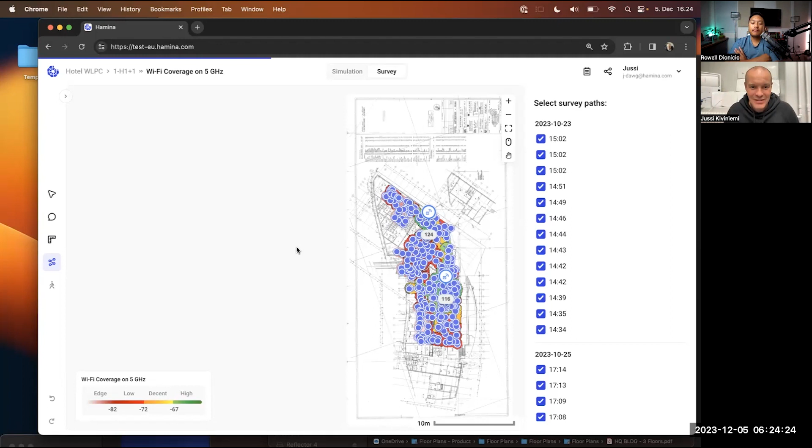And when you say points, are those the points that you tap, or the collection points that the device is collecting? In continuous mode, it's continuously scanning and interpolating also when you don't tap. Same with the line survey - it interpolates the readings all the time, even between the clicks. But in stop and go, it's pretty much only storing data at one point.

All right, so now you've opened up from your desktop the actual validation survey. This is the point at which you would actually do your analysis of the validation with a bigger screen. I mean, you could look at it on your phone if you wanted to, or maybe a tablet, but this would probably give us the best way to analyze everything.

Yeah, this is a little bit easier, and you can analyze the different surveys. We can see here that I only did, I guess, continuous. You could click on the AP, see their coverage, stuff like that, and also see the AP properties, the SSID - so you can see everything you're viewing of an AP that got placed during the validation survey.

You click on the individual AP, you can see what channel it's operating on, the channel width, the BSSIDs. And you can also put in the AP model number - we can't detect the model number automatically, unfortunately, but you could put it here for documentation purposes. You could document its mounting type and stuff like that, and then you could of course add notes and things of that nature as well.

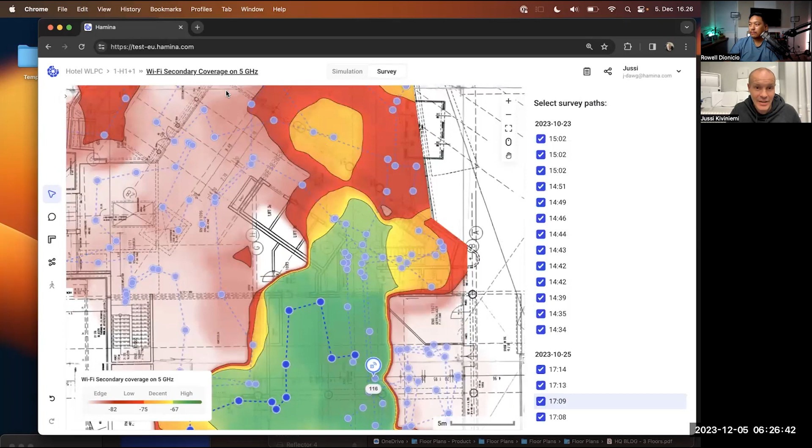If we want to look at secondary or primary for this specific SSID and frequency, this is the data collected by the hardware. But what if I'm using a handheld scanner? I'm pretty sure the received signal isn't going to be the same when you compare them.

Is there a way... man, I wish I got a dollar every time I hear that.

So absolutely, what we do is factory tune the devices down to like an iPhone-ish type of level, which is usually the least capable, most commonly used device.

If you need stricter thresholds, there are a couple ways to do it. You could alter a stricter baseline for your RSSI coverage here. There you go, you can see it shrinking.

If I set it overly dense, like 57, you can see the green area shrink. That's maybe the way I would probably do it myself.

At least in the beginning, the offsetting kind of thing is a hot potato, but if you ask me personally, I'd like to stay out of it as much as possible to avoid confusion in the industry. It seems like there are a lot of different schools of thought on this.

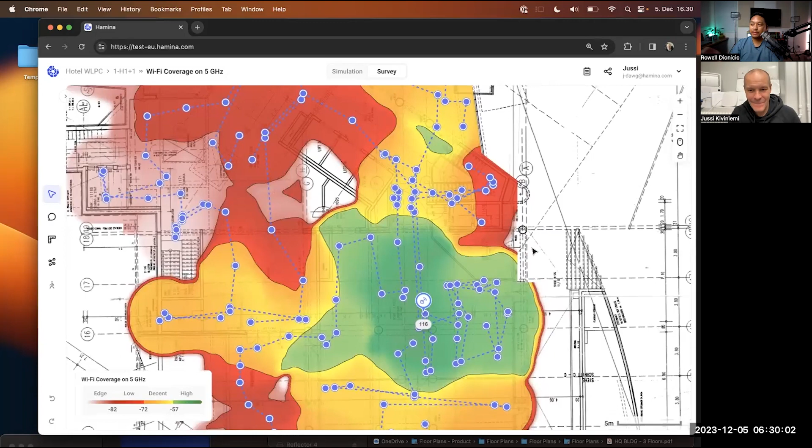Let's say I need to give a client something—this is very interactive for them to look at. What if they want something to keep for themselves, like a point-in-time record that Rowell did a survey for them or for us, and I need to show it to other executives and say, look, we did this survey, this is what the partner said. How does that work with the validation survey? Is there a reporting feature to it?

Yeah, absolutely. I think we covered it last time, or the time before—you have two reporting options. You have the static report, which works really well for survey data, like a snapshot: you can do a static report of it.

But you can also create an online report, and the surveys list is selectable too. So even if you add more surveys a year from today, we'll show the customer the timestamps of the survey so it's undisputed when the surveys were made. They'll also see which surveys were selected for this report, so there will be no question when it was done, what was done, and what areas were surveyed.

Then the engineer creating the report has the power to check and uncheck the options, just like before. And I noticed since you're using the mobile device, is it possible to take a picture of anything?